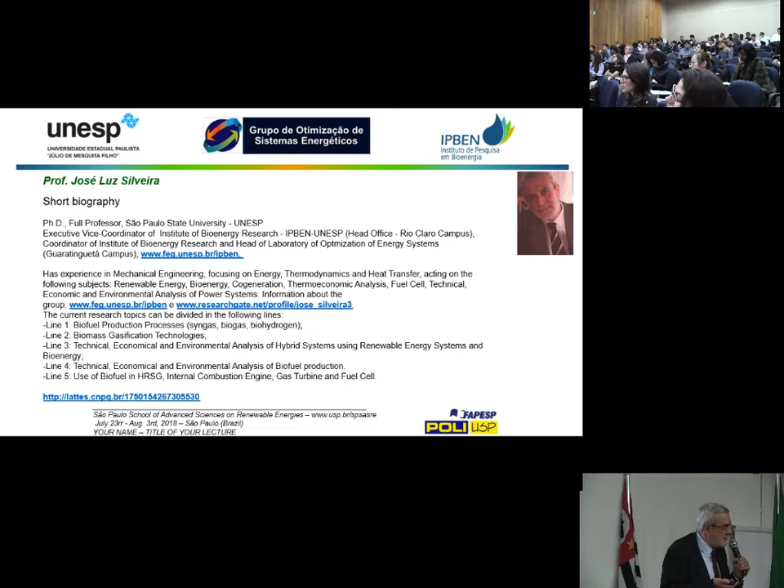This is my laboratory at UNESP. It's not mine alone - there is a group of professors and students who work on this. These laboratories were constructed through projects and financial support from FAPESP, the Council of Research and Development, and CAPES.

This is a vision of this laboratory, the Institute of Bioenergy Research in the College of Guaratinguetá, the Laboratory of Optimization of Energy Systems, with a partner working on electrical efficiency in these laboratories. We have organized some workshops also, as POLI has done in this case.

This energy sustainability, we have worked about this. There is some thesis about the sustainability in the hydrogen production process. It's very important. We have constructed some prototypes. In this case, I can work. This is...

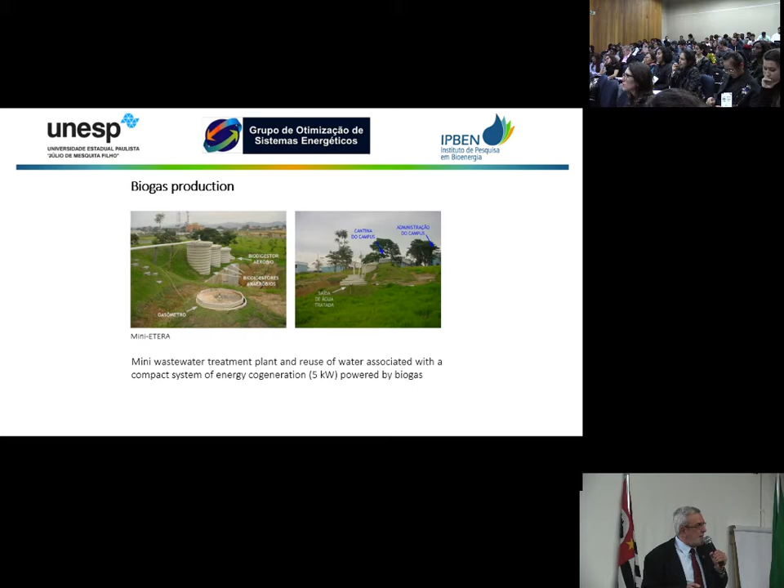This project was financed by FAPESP, by the Council of Research and Technology, and by the company Tigre. This is a project financed by the Council of Research and Scientific Development. It is prototype number 1.

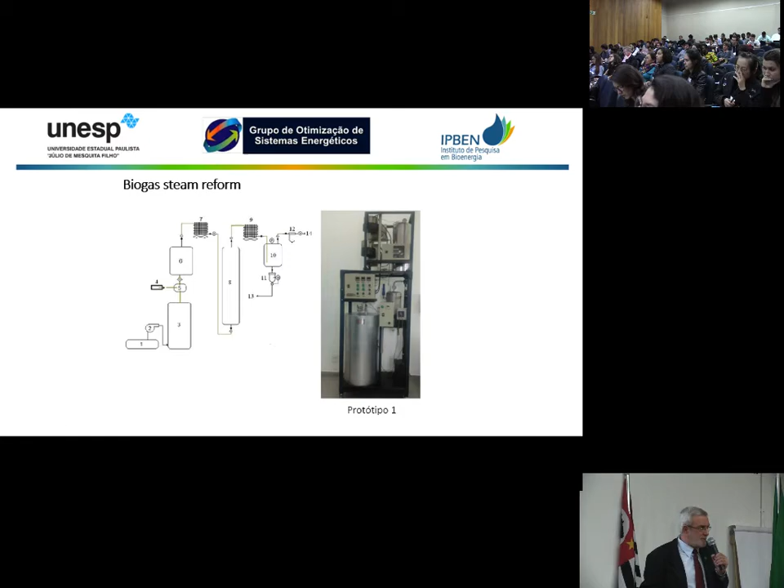It is a prototype developed for biogas steam reforming. This project was financed by FAPESP, the Foundation for Research of São Paulo State, the São Paulo Research Foundation, in its English name.

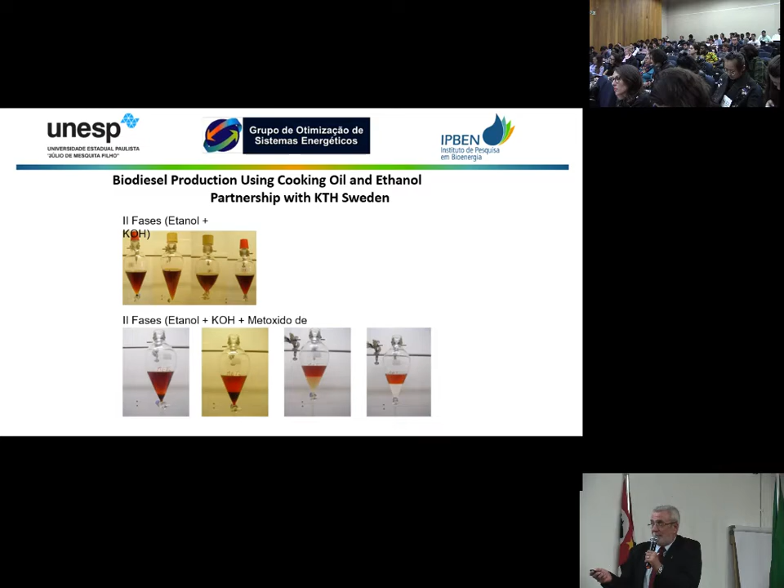This is the project about the production of biodiesel using waste oil from restaurants. In this case, it's very important: it's possible to produce biodiesel, but you need treatment of this biodiesel. After this, we worked on glycerol steam reforming. It's possible to produce hydrogen using this residual byproduct of biodiesel production. It's very important because if you use this glycerol energetically, the cost of biodiesel production is lower. The energetic valorization of glycerol is necessary for biodiesel to be competitive in the market, by lowering the cost of production. This is another project financed by FAPESP also.

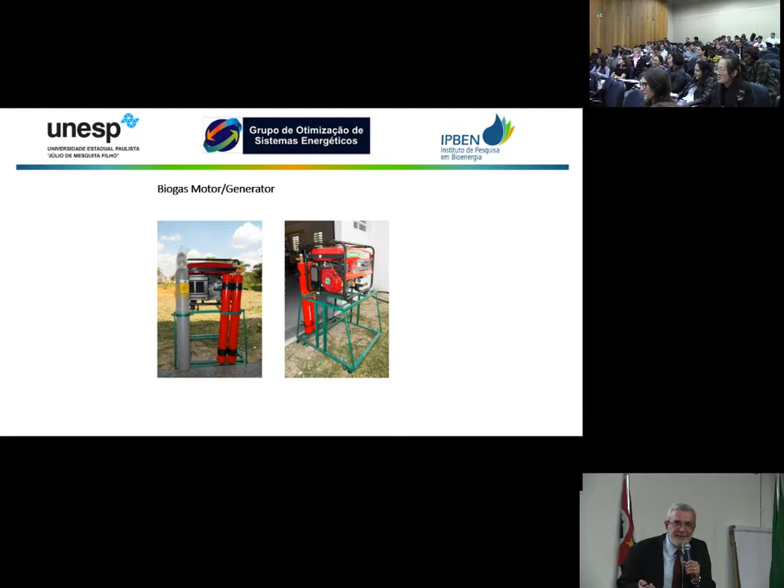This is an adaptation of the internal combustion engine to operate with cogeneration systems. In this case, we can use natural gas or biogas to produce electricity, and the water of the jacket for production of hot water. We also use the exhaust gases to produce more hot water, and finally use the gases at 250 degrees Celsius to run the absorption refrigeration system to produce cold water at 7 degrees Celsius. This project was also financed by FAPESP.

I love FAPESP. It's very important. Okay, thank you.

I love to study these prototypes. The idea is very important in thermodynamic studies—the possibility of sizing the heat exchangers and analyzing the thermodynamic losses.

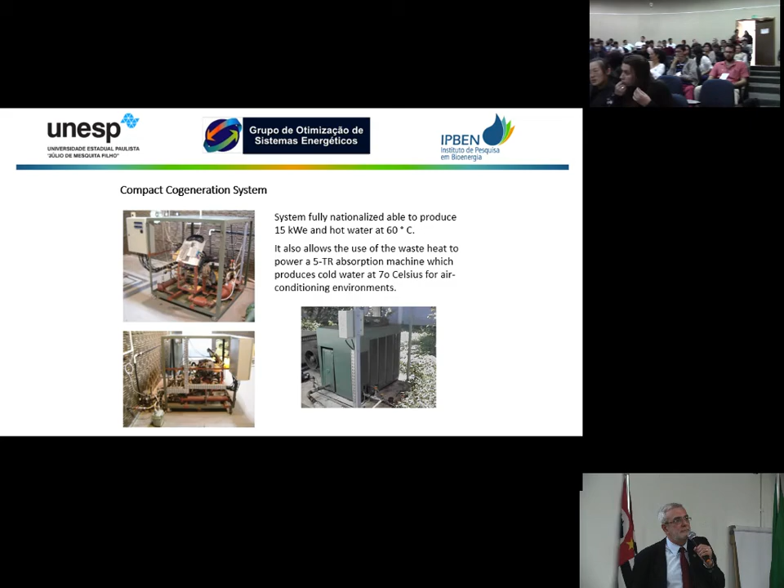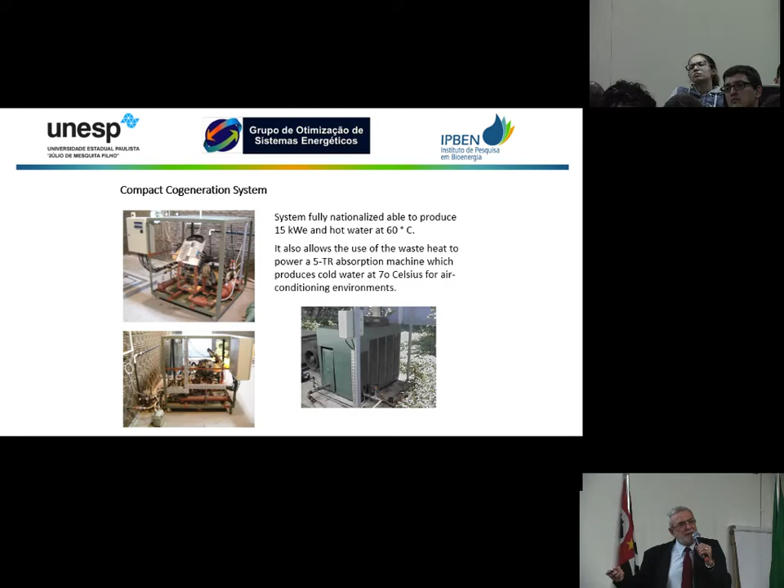Another question: why is the device's lifespan shortened when you don't use direct fuel burning to start the absorption machine? If you use direct burning, the life of the device is better, about 15 years. But using exhaust gases this way, the life is about 10 years maximum. The cost of investment for this kind of device is about $250 per kilowatt of refrigeration capacity.

The last master's and PhD research theses defended: thermoeconomic analysis and ecological efficiency of a thermoelectric plant with chemical absorption of carbon dioxide, and technical economic analysis of hydrogen production by glycerol steam reform.

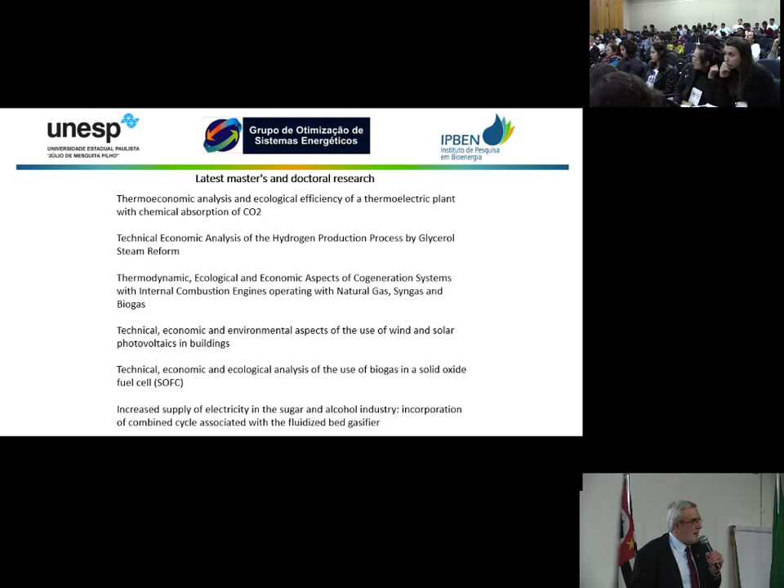There is currently a PhD thesis in development by Christian Lau, my student, through the Bioenergy Program of São Paulo State University, University of Campinas, and University of São Paulo, about the potential of bioelectricity production using combined cycle and gasification in the pulp and paper industry.

I love this topic, sorry. I love this—Suani, Professor Roberto also, I believe. I love it, it's my life.

The presentation of this book, in Portuguese, on Bioenergy. This book was written by professors at UNESP, professors of the Institute of Bioenergy Research.

I have 3 chapters in Portuguese: the use of biogas for production of cold water and electricity; biodiesel and syngas in internal combustion engines; and use of ethanol for production of hydrogen and for use in aircraft engines.

At this moment we have a project financed by CAPES and the Scientific and Technology Foundation of Portugal. It's very important—in this project we have considered the use of syngas blend mixture with biodiesel for bioelectricity production, using gasification of solid urban waste and biogas from urban organic waste.

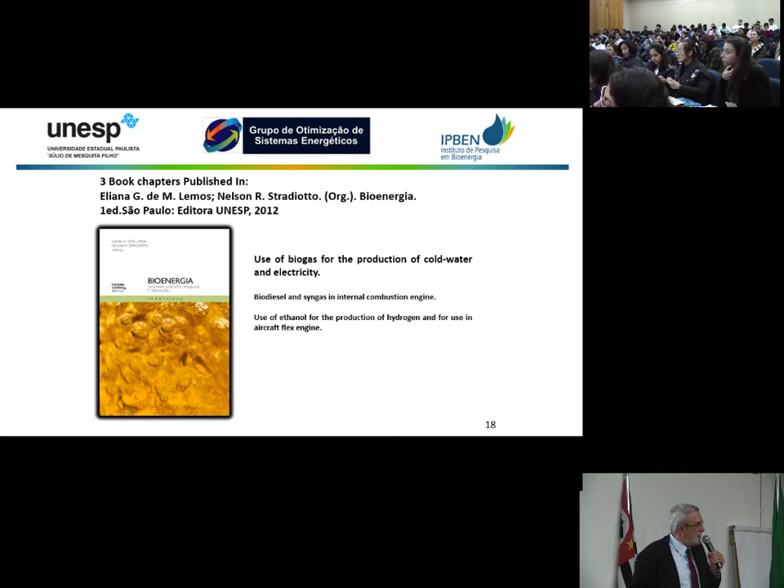This is a chapter of the book Biofuels in Brazil. In this chapter, technological advancements in biohydrogen production and bagasse gasification process in the sugarcane industry with regard to Brazilian conditions.

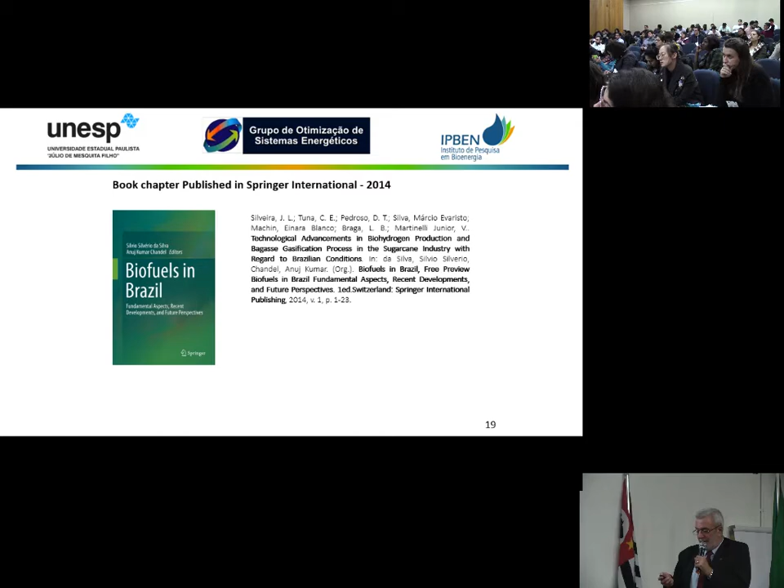For the development of science, I consider that papers and books need to be available. It's not important for a full professor to publish without showing it to people—people need to see, read, and study it. It's very important.

This is a project from CNPq about the gasification of sugarcane bagasse. In this case, it's the prototype for fluidodynamic studies, because there is sand and particulate bagasse, small particulates, and the air entering creates the flux current.

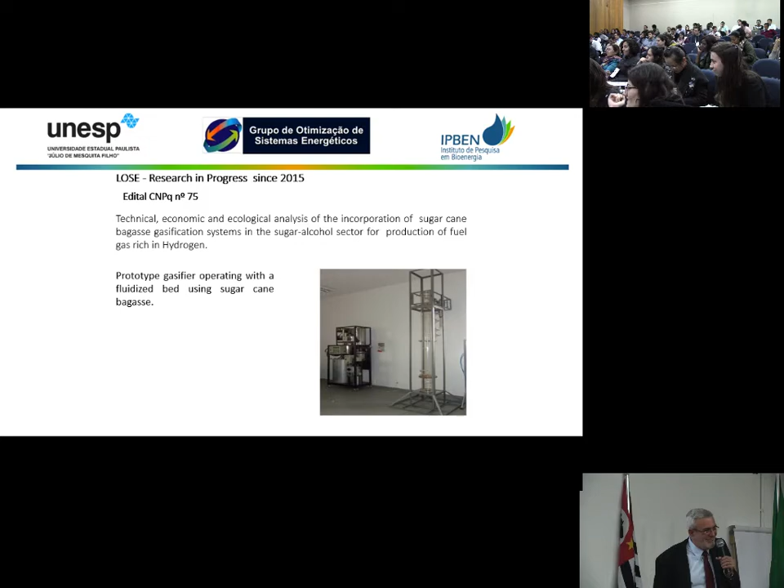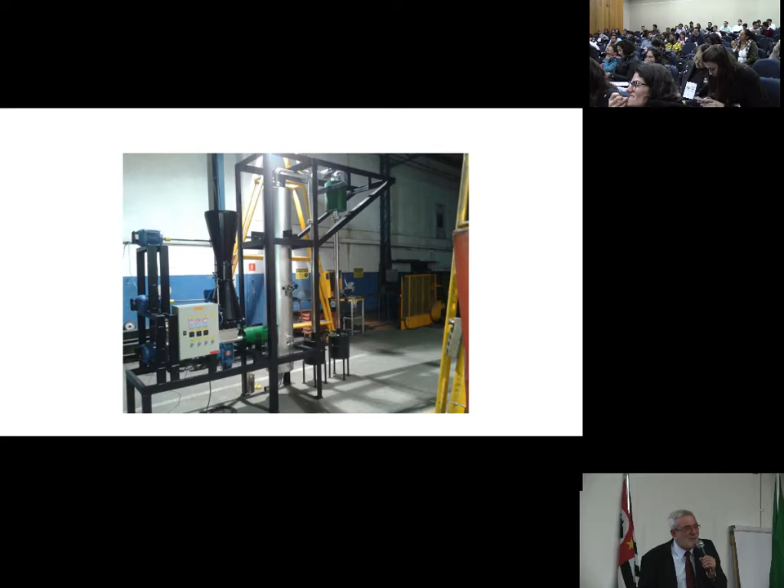It's very important. Now I have the prototype, but I don't have money for the operation. I need to make another project for financial support. It's not good for the resources.

Thank you. Just a quick question. Can you shortly explain how it works, so which unit is what?

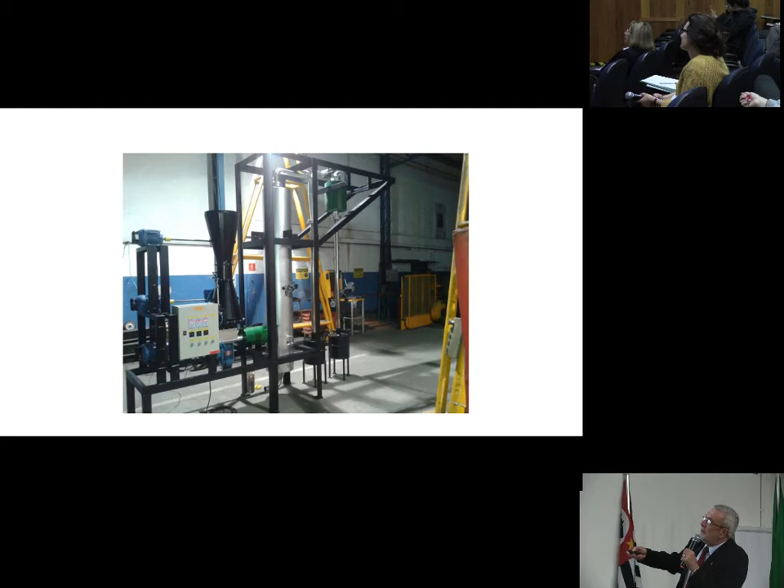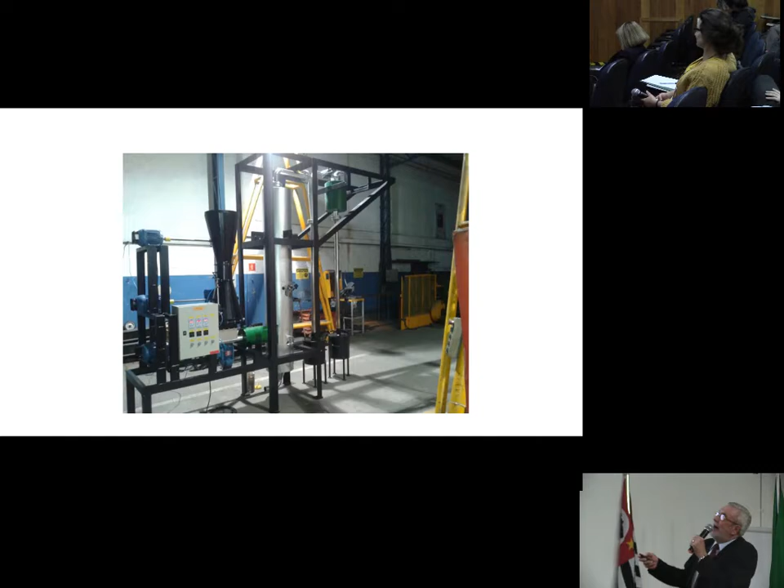There is a heat exchanger to separate the tar. After this, I have a syngas to use in a micro gas turbine, okay, in a heat recovery steam generator. I can use this kind of thing.

The gasification is very important. When I have syngas, depending on the gasification agent, I can use air, I can use pure oxygen, I can use steam as a gasification agent.

Okay, thank you. And one more question: is there something unique or specific about this prototype of gasification, different from other plants? In this case, it's a small gasification, but there are not many experimental studies about the gasification of sugarcane bagasse. Do you understand? There is use of other biomass, other kinds of fuel, but not sugarcane.

And my proposal, the proposal of my group, is this: increase of bioelectricity production in Brazil using biomass in the pulp and paper industry and sugarcane industry. There is a supply of electricity in the sugarcane industry, but there is not supply of electricity in the pulp and paper industry. Do you understand? And you need an increase of electricity production, bioelectricity production.

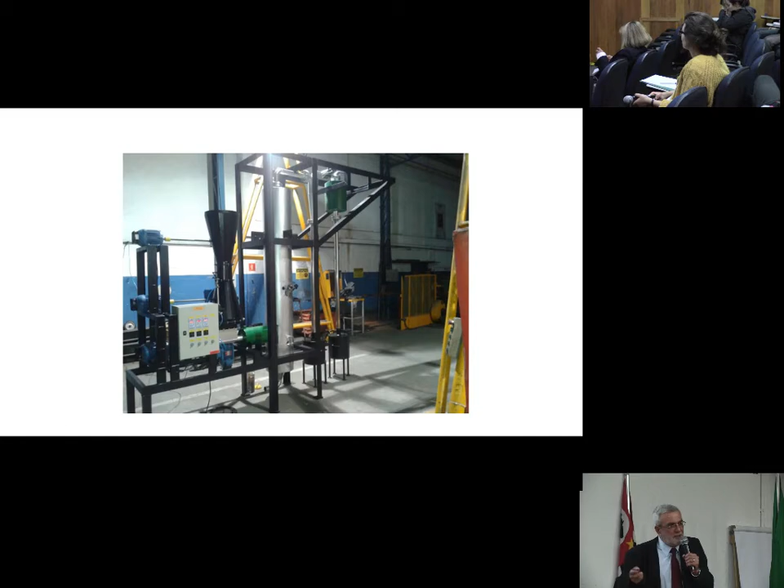In this moment, there is a crisis. The water in the reservoirs of the hydroelectric plants is not good in this moment. In São Paulo, perhaps there is a crisis. There will be a crisis about this.

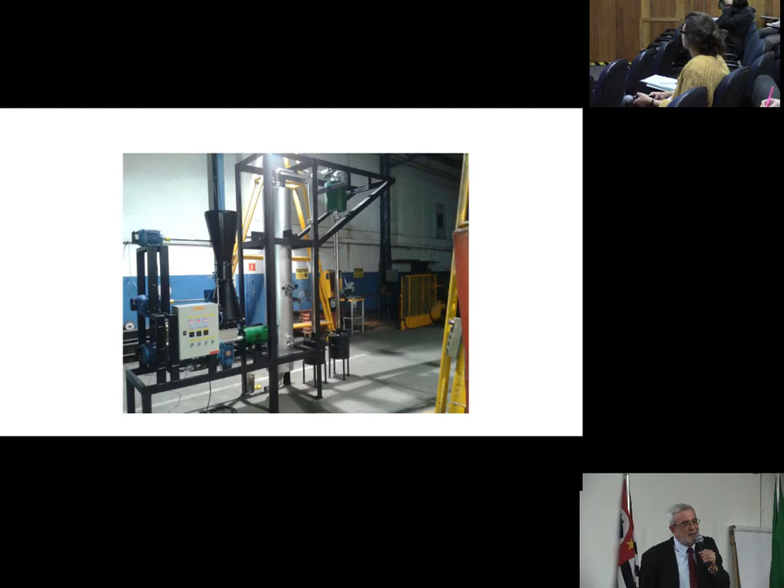And we have work about the potential. Pulp and paper and the sugarcane industry are the most intensive sectors using biomass, energy from biomass. And you need to increase this, and this kind of technology is very important.

In this case, we have photovoltaic systems in my laboratory, and we have bought a wind turbine, a vertical wind turbine.

In this place, Guaratinguetá, there is no wind velocity adequate as in Fortaleza, for example. So a horizontal wind turbine is not possible, because the horizontal wind turbine needs a minimum of 4 meters per second velocity. In Guaratinguetá, there is a velocity of about 2 meters per second. In this case, a vertical turbine is recommended.

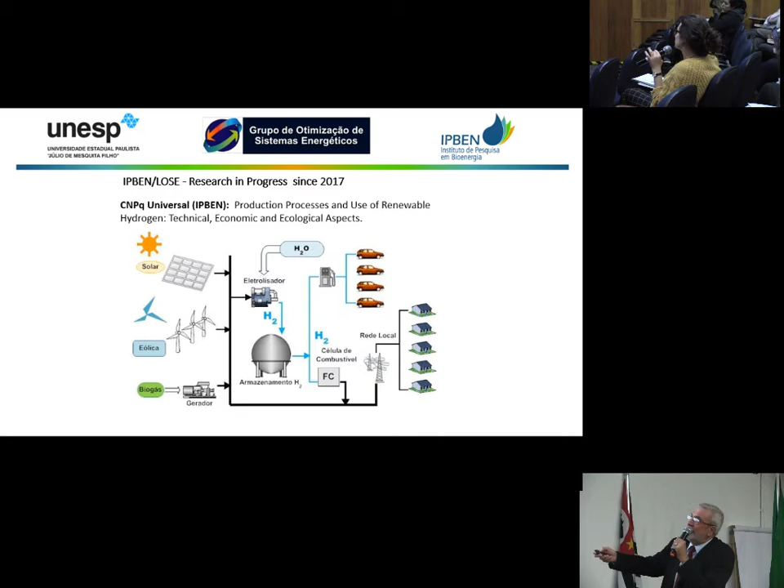The electrolyzer efficiency is about 60%, but the solar energy efficiency is about 15%. The final efficiency of hydrogen production is the multiplication of the efficiency of this power plant by the efficiency of this electrolyzer. See, it's very important.

The hydrogen will be produced only when I have supply of electricity. In Germany, there are some power plants operating based on this model. We have papers about this, and you need to consult them to go deeper.

I have a student working on hydrogen production from glycerol, João Tavares, and I have a student from France, Institut La Rochelle, Adrian, working on the electrical vehicle, the electrical car. It's very important, the future, but it's very important for the reduction of pollutant emissions.

These projects now... please, can you go back to the previous slide? Yeah, it looks like a hybrid system, right? Yeah, yeah, the name is hybrid systems, considering electricity, bioelectricity, but hydrogen production also.

I want to know the methodology behind it. Is it like, did you use mathematical modeling or simulation? Yes, yes, there are 2 or 3 theses about this.

The chapters of the thesis cover the introduction, the state of the art of hydrogen production processes, written in Portuguese, but there are chapters in a Springer book based on this thesis. There are studies about hydrogen production by steam reform, by electrolysis, and from algae. There is thermodynamic analysis of the hydrogen production process, analysis of the hydrogen production process, and environmental analysis of the hydrogen production process.

In the case of environmental analysis of the energetic process, there are six models of environmental analysis. But in particular, I like a model by Cardu and Baica that considers the emissions of pollutants indicated by the World Health Organization. There are limits of emissions for human life and for plant life, and this is considered for the determination of environmental efficiency.

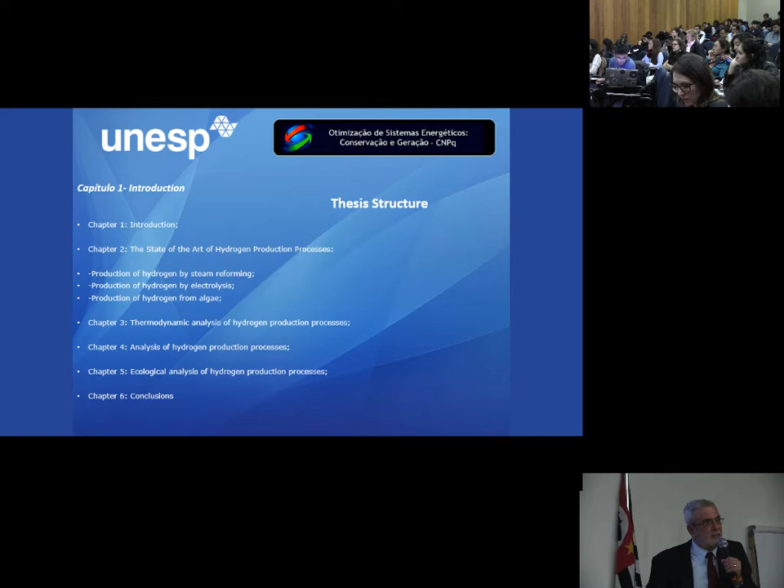This thesis is written in Portuguese, but there are 5-6 papers published in journals in English about this. These papers are available on my site. Some students there worked on hydrogen. There are many papers, okay, but we have some too.

The objective of this PhD thesis is to assess the hydrogen production process on technical, economic, and environmental issues: the technical energy efficiency of each process, and the economic determination of the cost of hydrogen production based in US dollars per kilowatt hour.

You know hydrogen has a high lower heat value, high energetic density. The lower heat value of hydrogen is about 120,000 kilojoules per kilogram. In comparison, natural gas is about 47,000 kilojoules per kilogram.

Why produce hydrogen? Because hydrogen is a small molecule, it's a fuel with high energetic density. It's very important - humanity needs to store energy, and it's possible to store hydrogen.

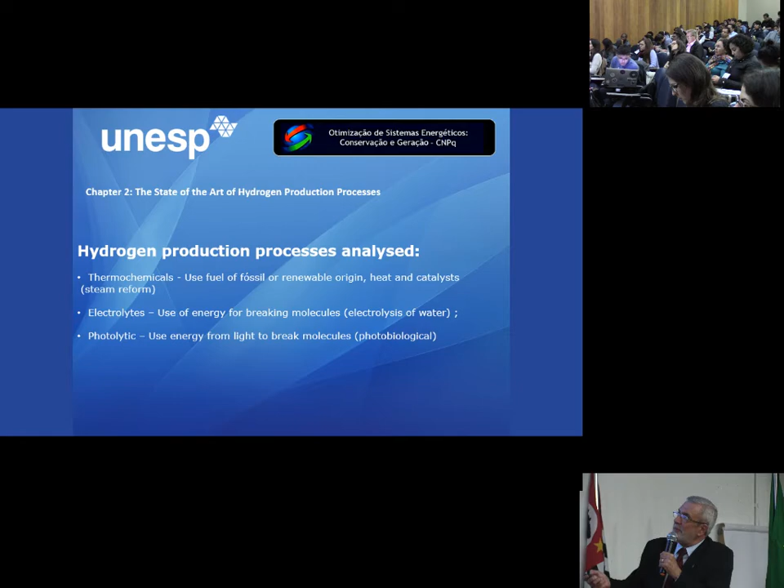Some pictures about the hydrogen production processes analyzed: thermochemical, electrolytic, photolytic.

Steam reform for hydrogen production. In this case, fuel and water go to a steam generator to produce the steam mixture, and in the main reforming process it operates at about 700 degrees Celsius. You need a shift reaction to reduce the carbon monoxide, because carbon monoxide...

...is not good, for example, for proton-exchange membrane fuel cells. The contamination of the electrolyte is very bad for the life of this kind of fuel cell device, because the production of hydrogen is meant to be used in fuel cells.

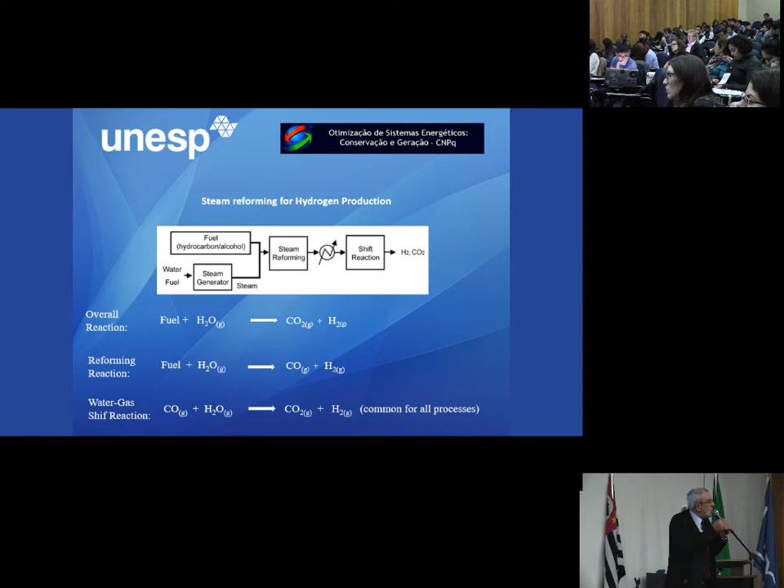It's not possible to use direct combustion in an internal combustion engine with hydrogen, because of the temperature and the materials involved. In this case, the internal combustion engine would need to be constructed using niobium, zirconium - very, very expensive.

Many people ask, why don't you use a direct hydrogen internal combustion engine? It's not possible, but you can perhaps use a small quantity of hydrogen. Some experiments and studies consider a car using an internal combustion engine with a small electrolyzer for hydrogen production, injecting it together with gasoline. That's possible, but pure hydrogen alone is not possible.

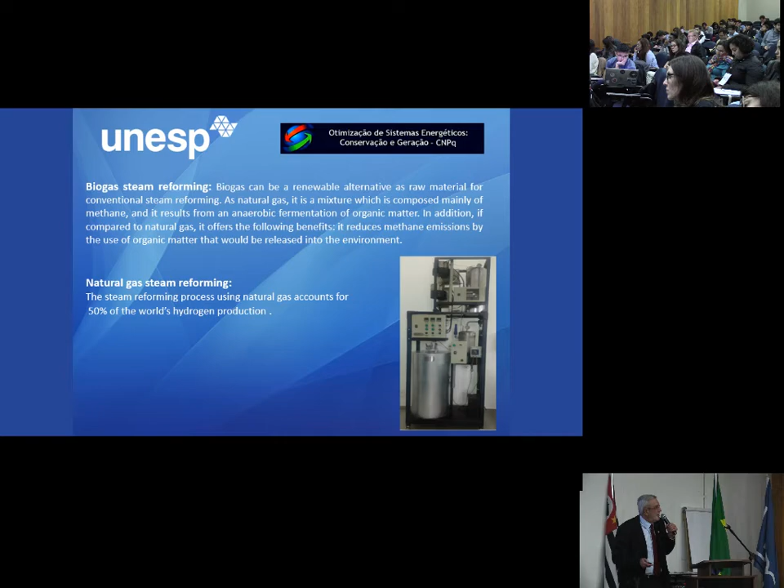It's very important in this case for steam reform - prototype number 1, the biogas steam reform. There is a small steam generator that produces steam which is input into the reformer together with biogas for the chemical reactions to produce hydrogen.

The electrolysis process, as you know from undergraduate studies: the electrolyzer has anode, cathode, and electrical current passes through distilled water to produce hydrogen and oxygen. The fuel cell is the reverse process - hydrogen at the anode, oxygen or air at the cathode, to produce electricity.

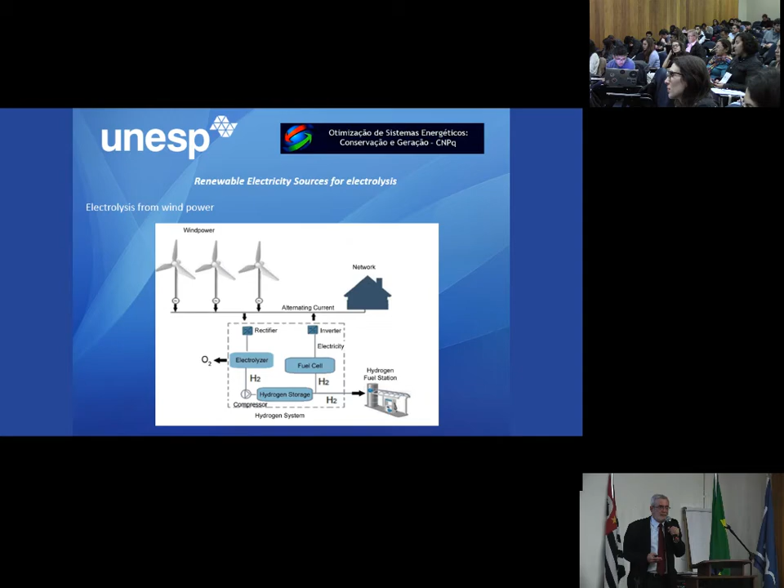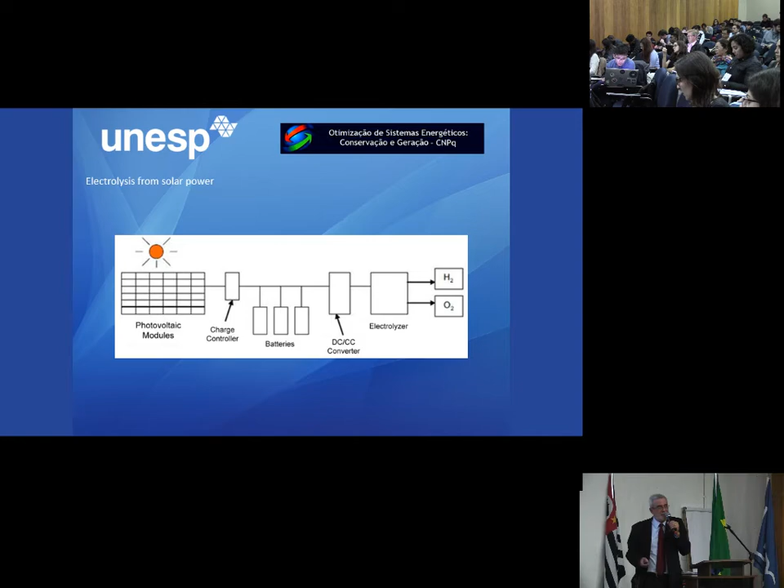Solar hydrogen production - this device and scheme is shown in the Springer book. Sometimes when I have water at night in hydroelectric power plants, I can use the produced electricity with an electrolyzer to produce hydrogen, and store it for use at another time.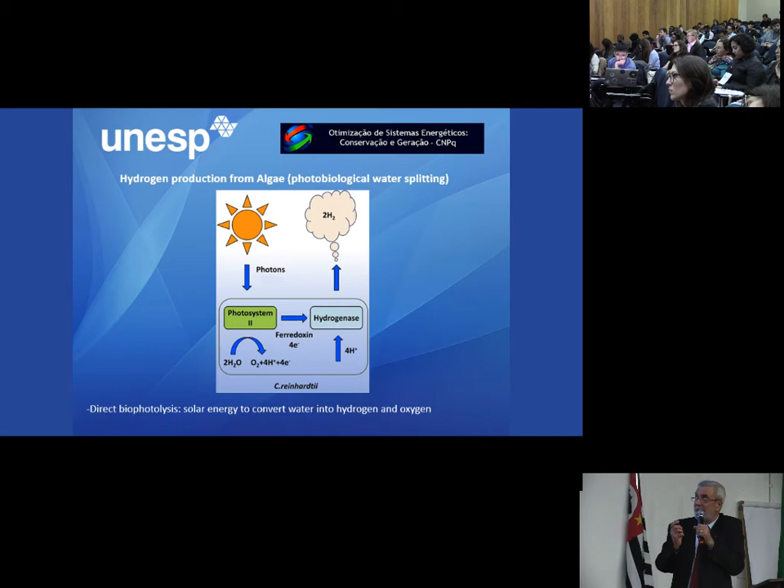Microalgae - there is a process using cyanobacteria as well. The cyanobacteria consume the microalgae and produce hydrogen, the pool of hydrogen.

This process uses solar lighting or night lamps - special lamps to permit the production of hydrogen. This research was developed together with Florida State University. My friend, Professor Juan Ordonez, was a co-supervisor of this thesis, and the experimental studies were made at this university.

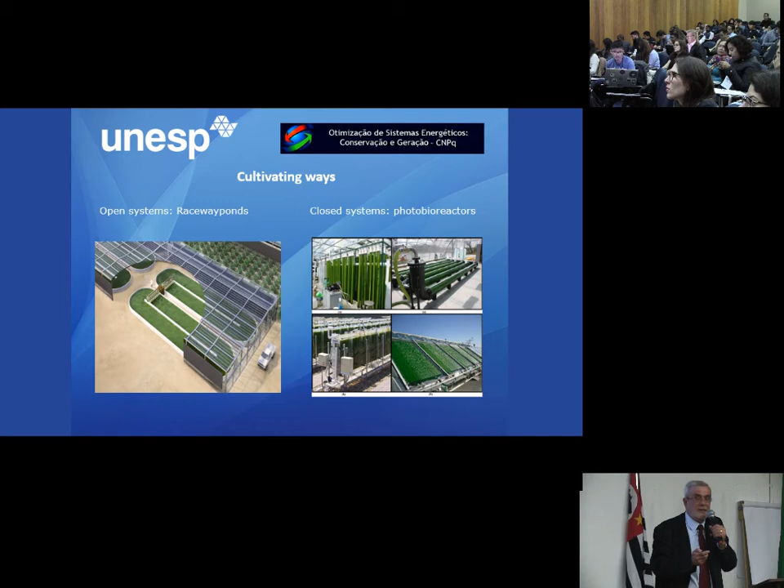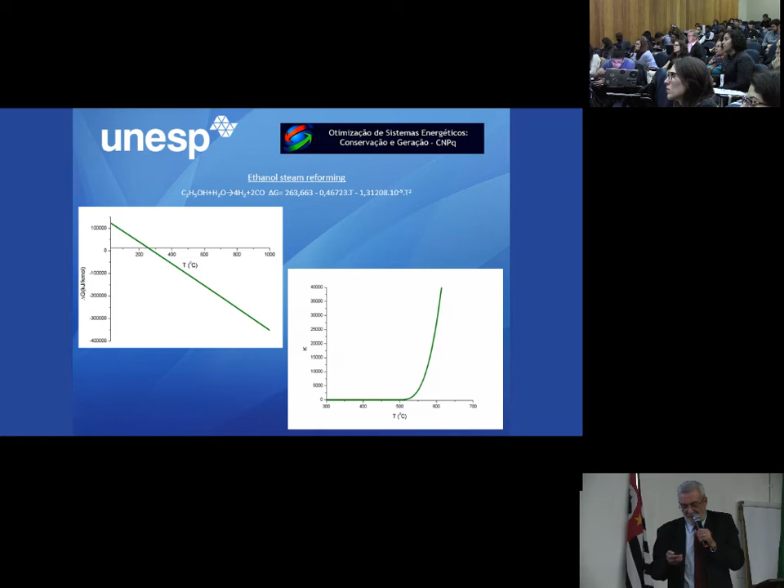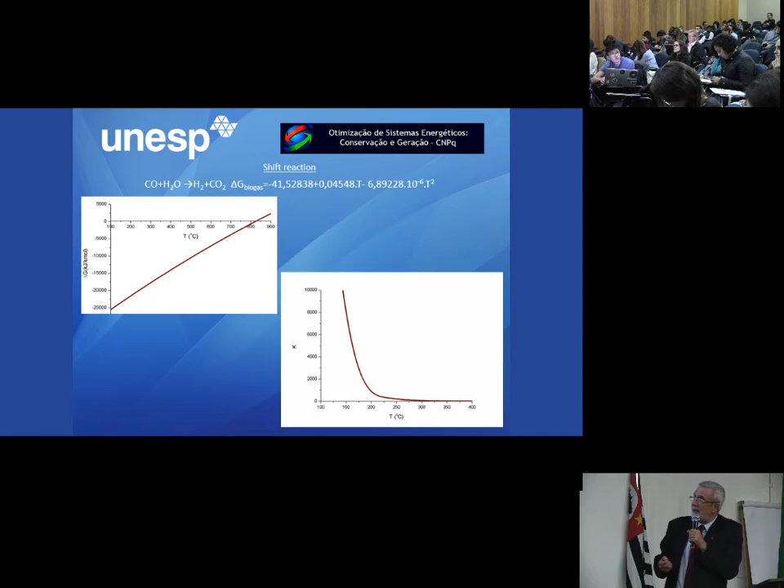Reactor shift. Some curves. The influence of the pressure.

Many times people consider high pressures for steam reformers, but it's not necessary. More pressure indicates more level of irreversibility in the process, because high pressures need more energy to operate. It's not so good.

Many cases, I don't have time, and I need to discuss the power plant energy efficiency of the electrolysis process. It's very important.

Electrolysis for wind hydrogen production: there is 29-30% global efficiency. Solar is about 10%, 12%, 11%, because the photovoltaic panel has a lower efficiency of power plant.

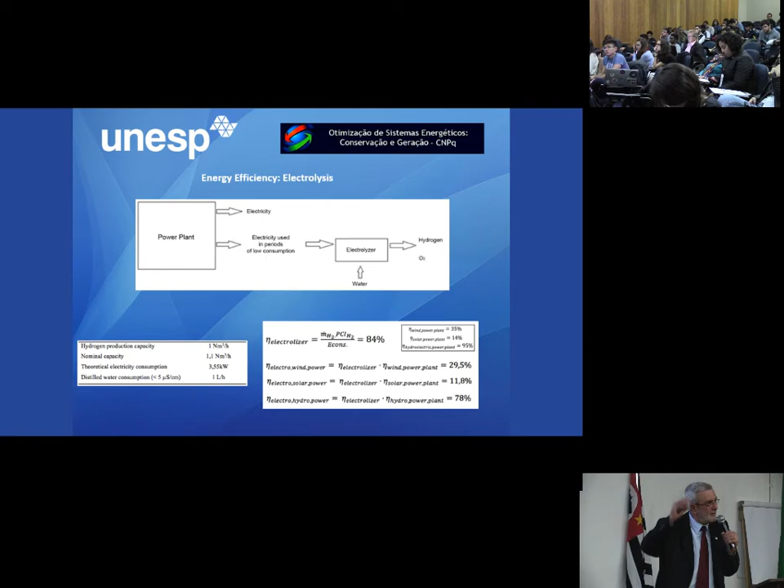Lower efficiency of power plant. Electrolysis for hydroelectric power plants is very high because the efficiency of the hydroelectric power plant is very high, 90%, 80%. You understand? It's very important.

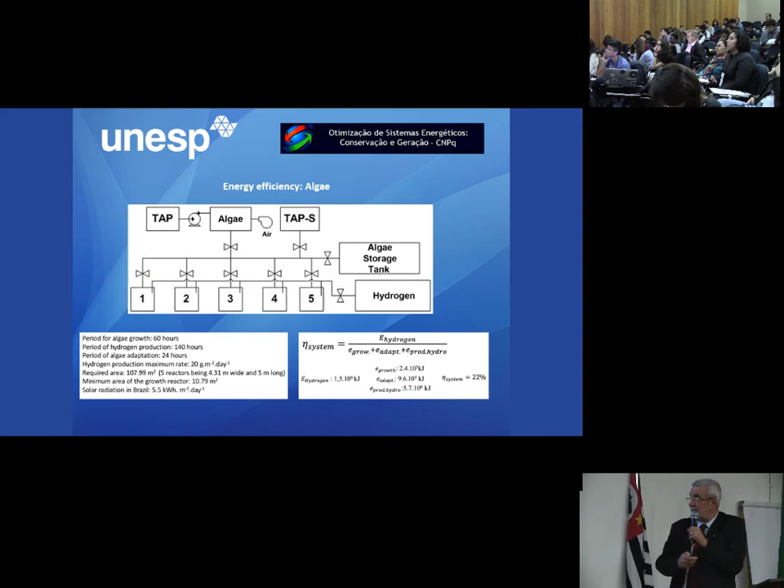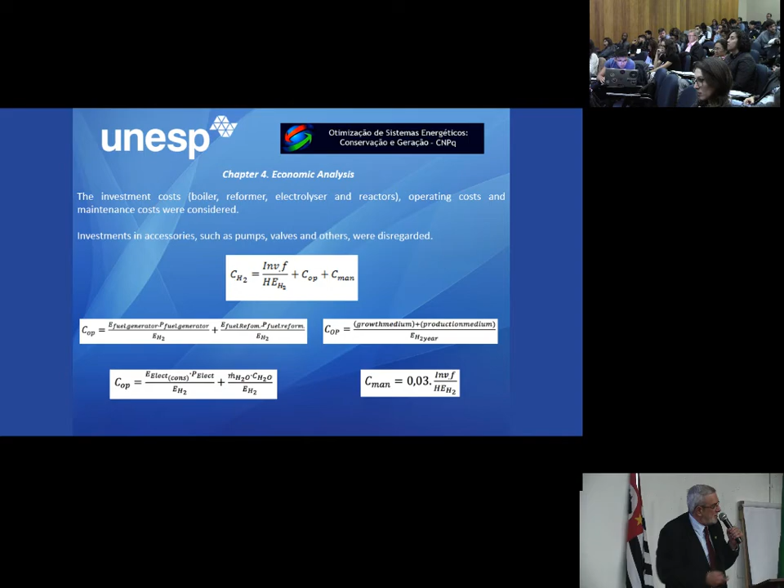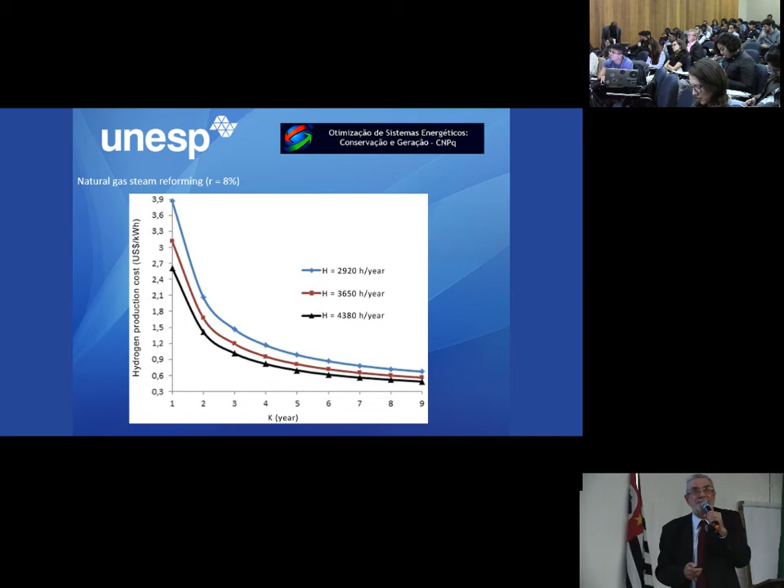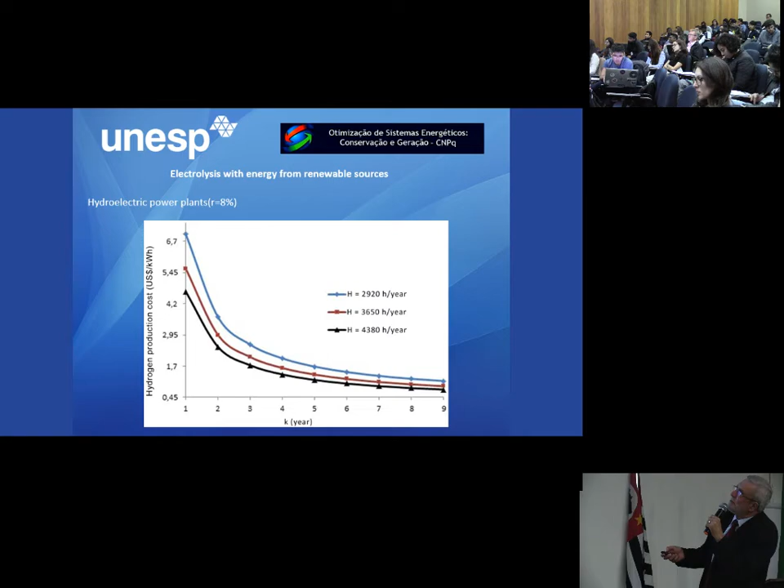In this case, natural gas steam reform, the cost of hydrogen production. In this case, biogas steam reform. In this case, wind power, wind hydrogen production cost. In this case, hydrogen production cost considering solar energy, very expensive. In this case, hydrogen production process in hydroelectric power plants.

Using algae, and the cost of hydrogen production across all processes. Steam reform of ethanol is very good, it's very good, it's very cheap.

I believe in hydrogen production in the sugarcane industry in the future. The power plants, the sugarcane industry can sell also hydrogen in the future.

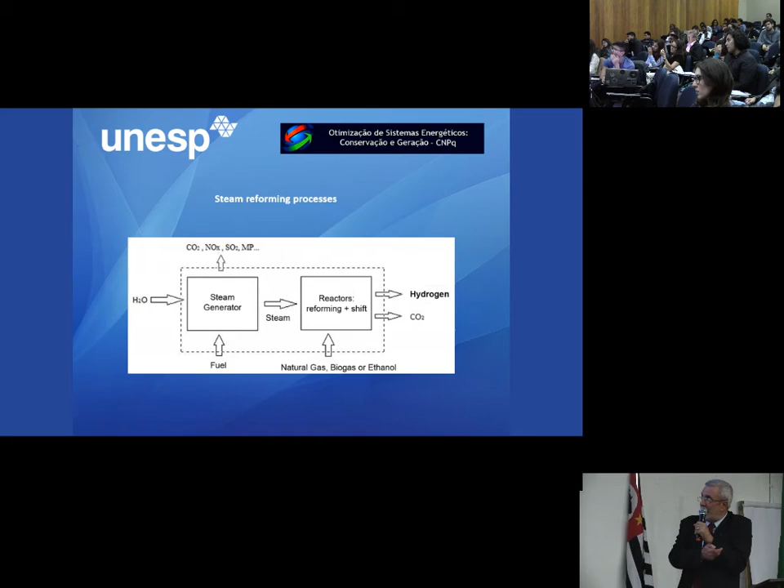It's very important. About the environmental efficiency, the modeling of Cardu and Baica, and this equation which indicates pollutant emissions, equivalent dioxide of carbon, is determined for all the process, and I have in the final a comparison with all the processes: environmental efficiency, dioxide of carbon equivalent indicator, pollutant indicator, kilograms of dioxide of carbon equivalent per kilogram of hydrogen, and you have the indicator.

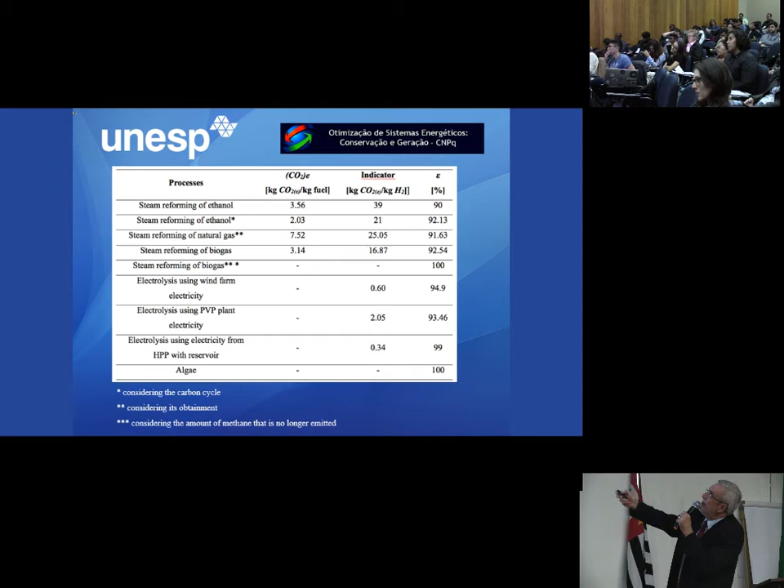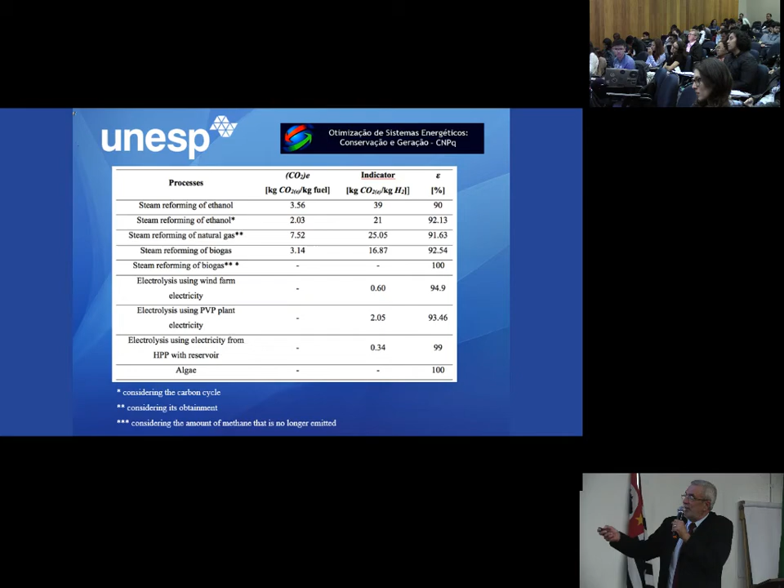The best efficiency is algae. Environmental efficiency is very high, and the lower efficiency is for this process, steam reform of ethanol in this case, but this does not consider the credit of dioxide of carbon. If I consider the dioxide of carbon, the second is algae, and it's not important.

I don't have time, but it is very important. Okay, it is very important.

He studied technical and environmental issues of the hydrogen production process from biogas and its use in PEM fuel cells, proton exchange membrane fuel cells. In the past, Nafion was a waste product, Nafion from DuPont. And after this, they discovered its electrochemical properties, and now this material is very expensive, okay?

Because this kind of PEM fuel cell is very good for electric cars, operating at about 100 degrees Celsius, okay?

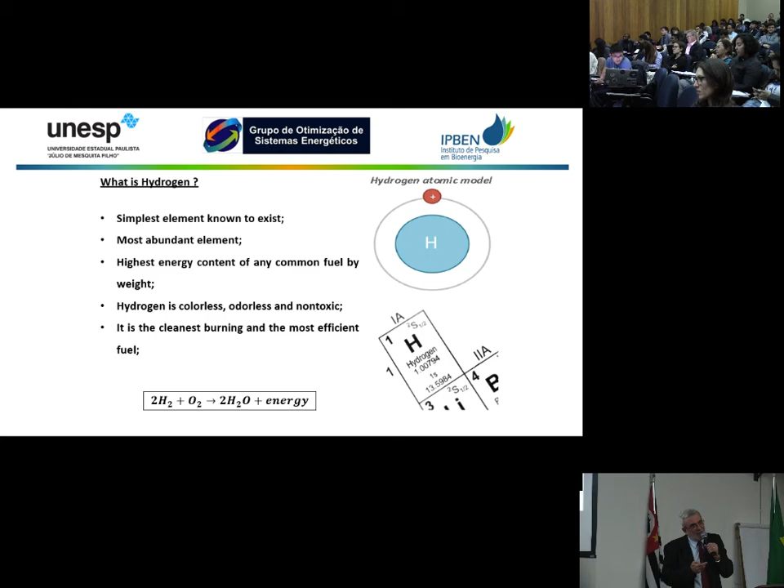There are other kinds of materials for hydrogen production. Hydrogen is very important, for example using water energy for production. But there is no cleaner fuel than hydrogen.

We consider some studies to reduce environmental greenhouse gases. In a landfill, there is production of biogas. This biogas can be used to produce hydrogen. In the fuel cell, there is the anode, the cathode, and the electrochemical substance for production of electricity.

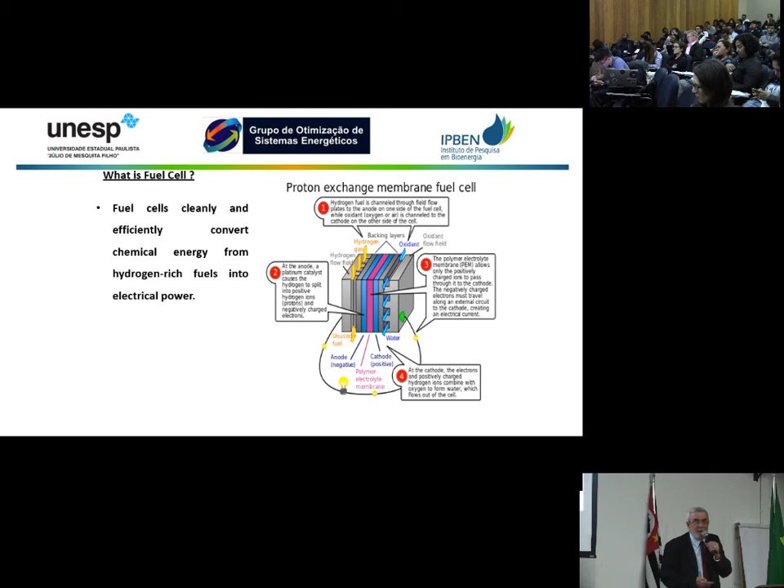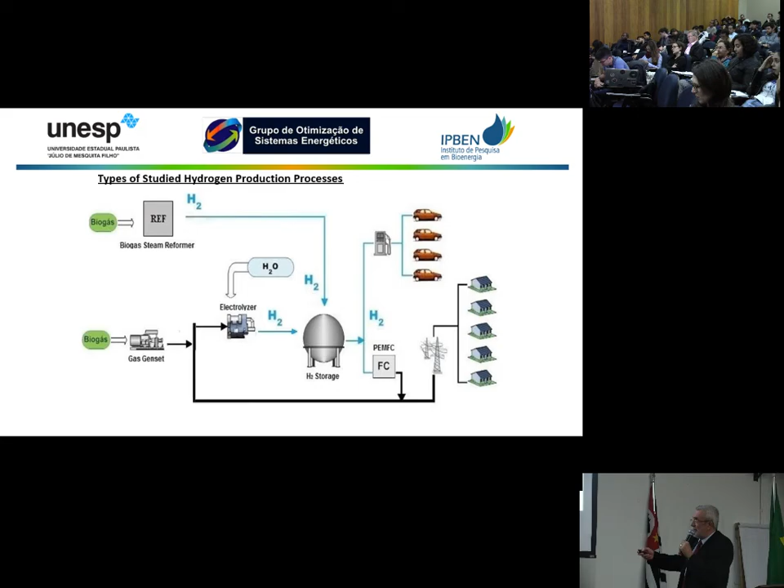This is part of old projects that we have developed. In this case, we use biogas with steam reforming directly for hydrogen production, or we use the biogas for bioelectricity production and use this bioelectricity for hydrogen production. Then this hydrogen is used in a fuel cell.

It's an electrolyzer, commercial, available in the market. And steam reforming of the biogas.

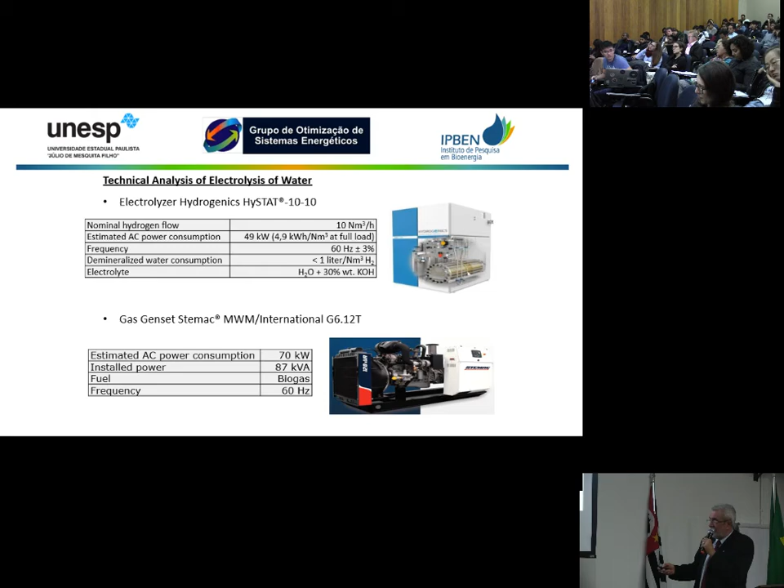Some electrolyzers in the market, their hydrogen production capacity, power consumption, and some equations. The electrolyzer efficiency for hydrogen production is the ratio of hydrogen energy production, power production, by the consumption of energy in the process.

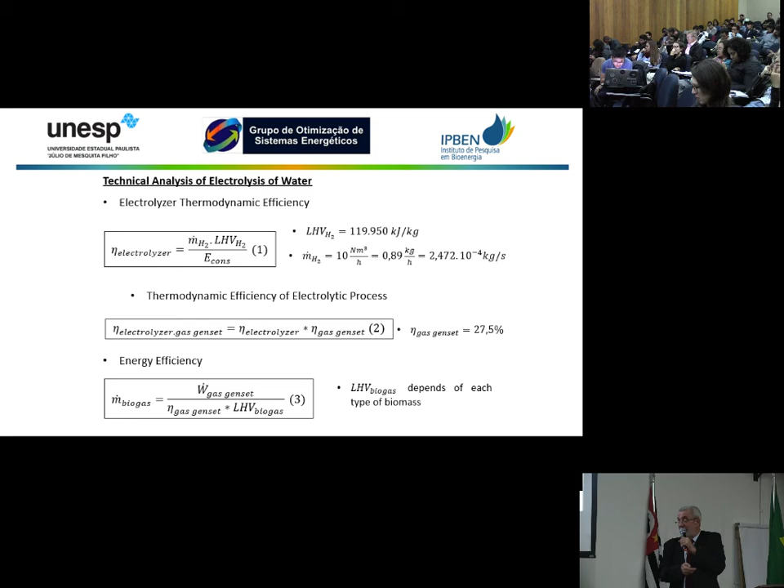There is a thermodynamic efficiency of the process, the electrolyzer efficiency, and the efficiency of the engine. Energy efficiency and the flux of biogas — it's possible to use this equation to determine this energy parcel. Some equations.

For steam reforming of biogas, the efficiency of the steam generator is considered. The thermodynamic efficiency of the biogas reform process is the mass flow of hydrogen times the low heat value of hydrogen, divided by the energy used in the process, considering the biogas low heat value for steam reforming.

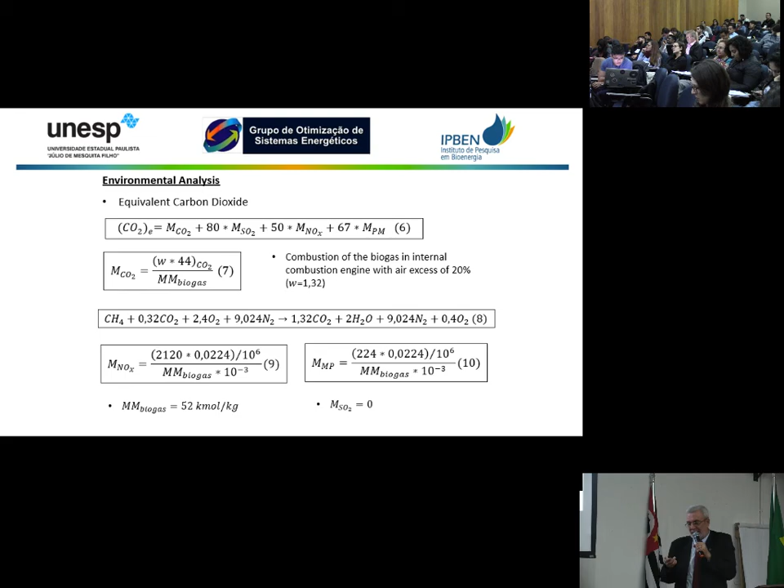In this case, you use the biogas for bioelectricity production and the biogas conversion to hydrogen. Main equations for the carbon dioxide equivalent. This paper is also available on my site. The pollutant indicator, the environmental efficiency, using the model of Cardu and Baica.

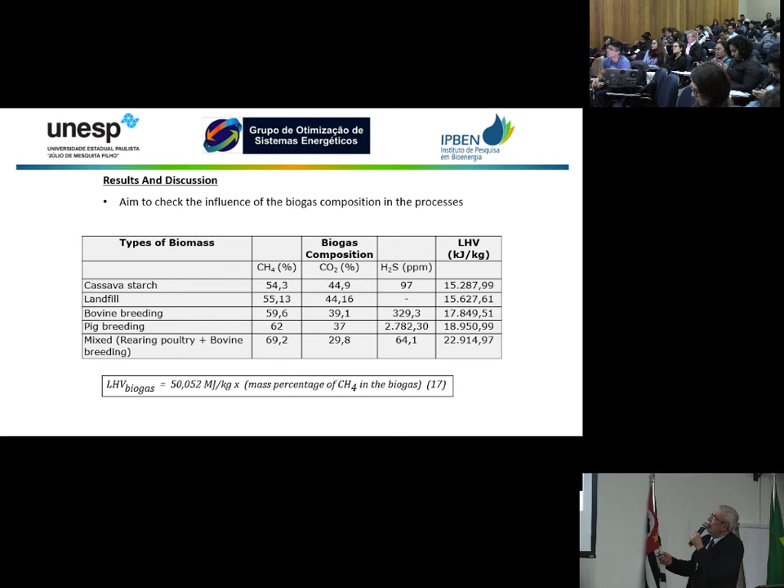Electric cars in the future will also use fuel cells, proton exchange membrane fuel cells. Many equations for calculation, many pieces of information, and some results of the biogas composition, the low heat value of the biogas, and the results of thermodynamic efficiency of the process: steam reforming of biogas and electrolysis of water.

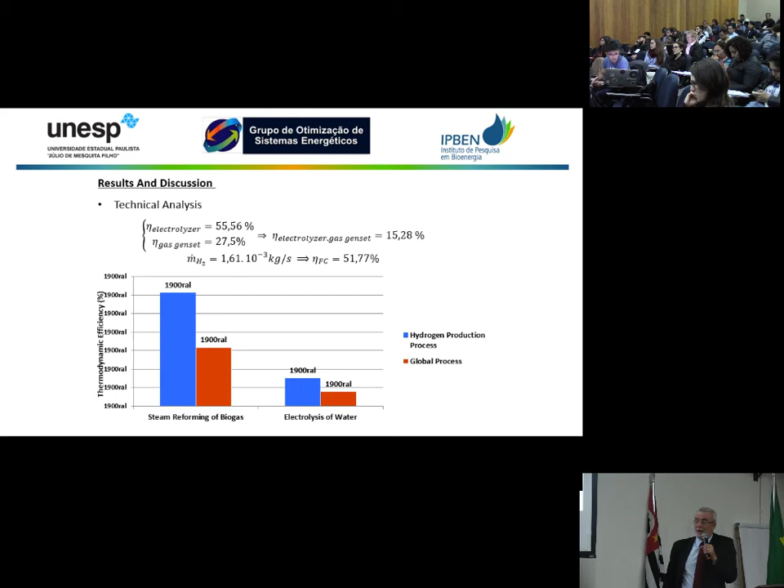Electrolysis of water presents a small efficiency, but it's very important. The steam reform process is often very expensive to consider. Some equations. Conclusion: the use of biogas from the landfill of São Paulo City for bioelectricity generation.

This is very important. It's part of the master's degree of Mariana Carvalho Guimarães. This thesis is in the middle of development. Regina Francielli is a PhD student and she also studied the use of biogas for bioelectricity production.

The objective is the development of technical and economic analysis of the use of biogas generated in the landfill from São Paulo City, Brazil, comparing the use of an internal combustion engine versus micro gas turbines.

Thermodynamically, there is a difference between using a micro gas turbine or an internal combustion engine. Why? An internal micro gas turbine has an air-to-fuel ratio of about 60, while an internal combustion engine has an air-to-fuel ratio of about 10 or 11. So in a micro gas turbine there is a greater quantity of exhaust gases.

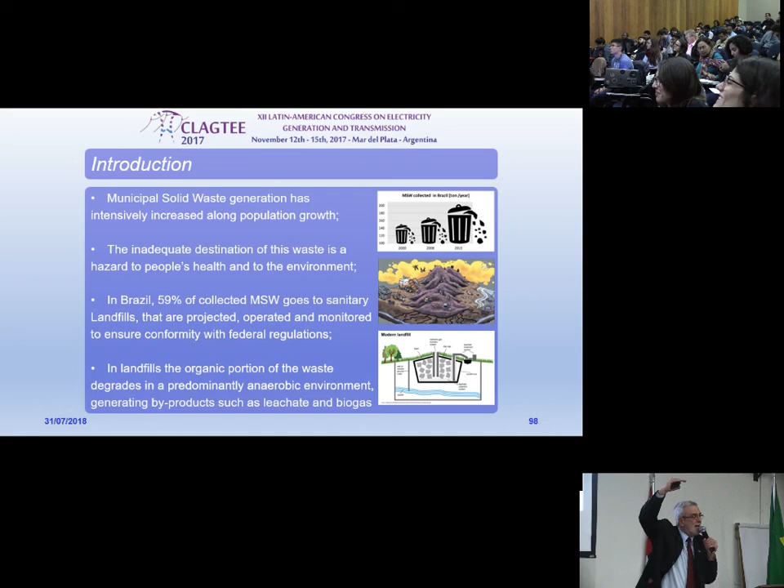In a landfill, there is a life cycle of about 18 years for biogas production. After this, the biogas production decreases. The useful life of the landfill is about 30 years.

Professor, may I have a question here? Okay, wait.

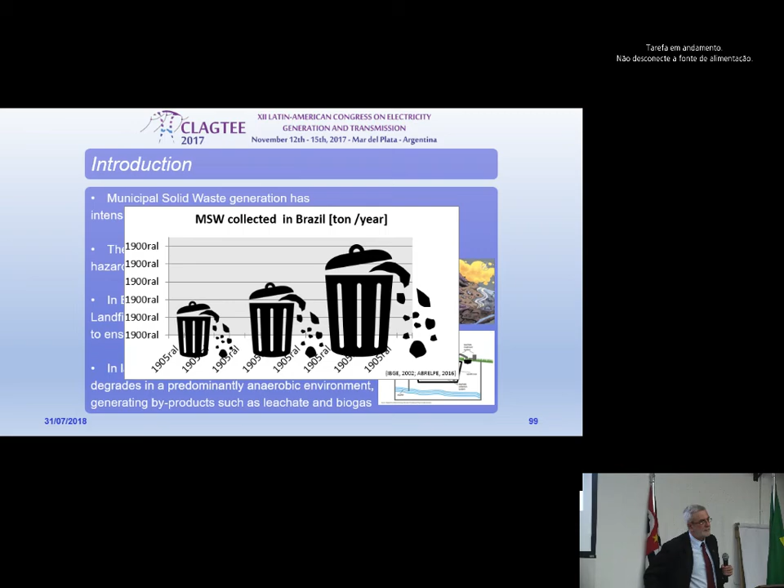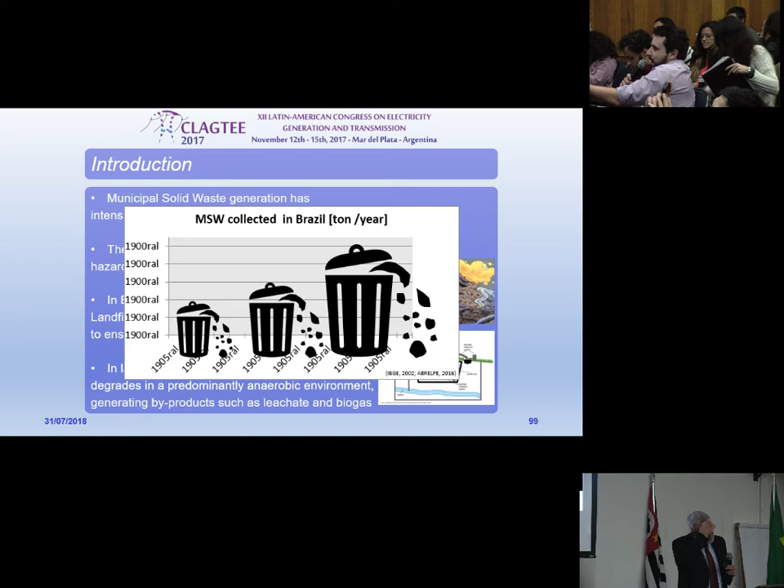Are you assessing the feasibility of using gas turbines or internal combustion engines? As far as I know, it's cheaper to buy an internal combustion engine here in Brazil for this kind of solution. But there is an assessment of the concentration of methane in your biogas, which affects the pollutant emissions from one kind of combustion to another. Both are in high pressure ratios, and they generate some kind of pollutants that doesn't happen when burning in ambient pressure.

Did you see it as a feasible solution to use gas turbines with bottom cycles that could also generate energy, like the organic Rankine cycle, or the one with ammonia mixed with water, which is a kind of Rankine cycle already used extensively in Europe? But in Brazil, in South America in general, there is only one installation, in Chile, generating something around 15 megawatts. This is a technology feasible to generate a lot of electricity, but why do I not see any movement to study it?

I believe in organic cycles, using these cycles in landfills. I believe in it for the future.

I know some papers about this, but in this study we have considered the micro gas turbine because some landfills in São Paulo city already use internal combustion engines. In this case, the power capacity of the internal combustion engine is not higher, because in the market there are not many internal combustion engines with high capacity available.

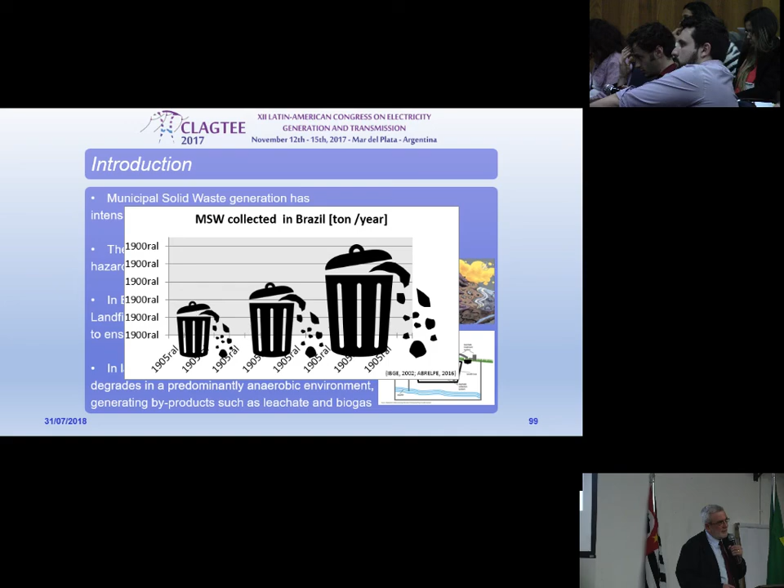I understand that the composition of biogas from landfill is very good. It's about 60% methane, and about 40% carbon dioxide, considered in this case.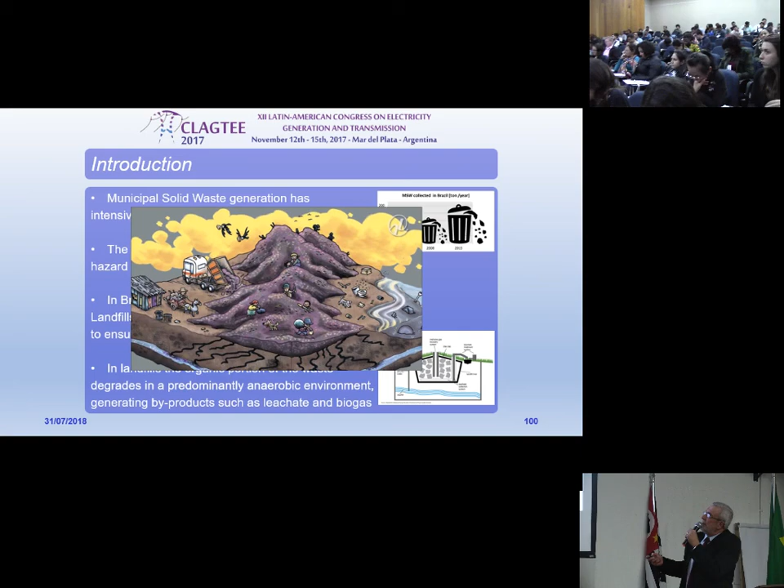But I have some information for you about your question. This is the evolution of municipal solid waste in Brazil. It's very important, the increase. The municipal solid waste generation has increased.

Visiting São Paulo city today, I see the river, and it's very important that the population be educated about this. It's not a political problem alone; the population is also responsible for the generation of this kind of waste.

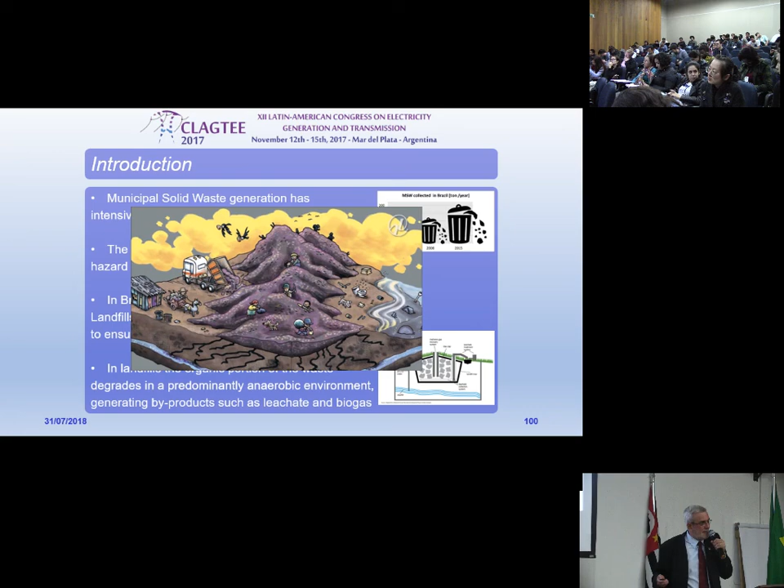And the modern landfill, the biogas production, and the recirculation are very important. A landfill has a lifetime of about 30 years, with 18 years of increasing electricity production, and after that it decreases. So the economic analysis is very important, because this decrease raises the cost of bioelectricity and biogas production.

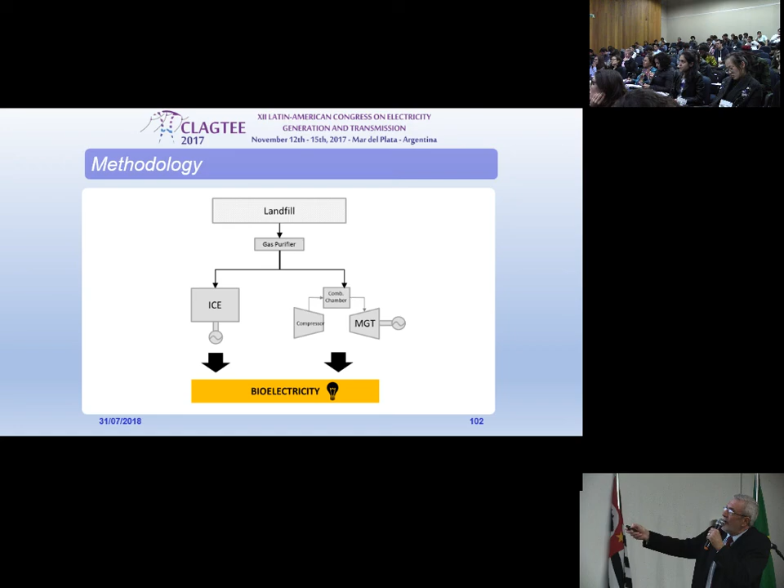We have considered the purification of gas. For landfill biogas, using an internal combustion engine or micro gas turbine, the idea is a comparison of the bioelectricity production.

So the biogas composition considered in this study includes the Caieiras landfill, the biogas production from the CDR landfill of São Paulo, and the CTL. Based on this quantity of biogas available, what is the capacity of the bioelectricity production?

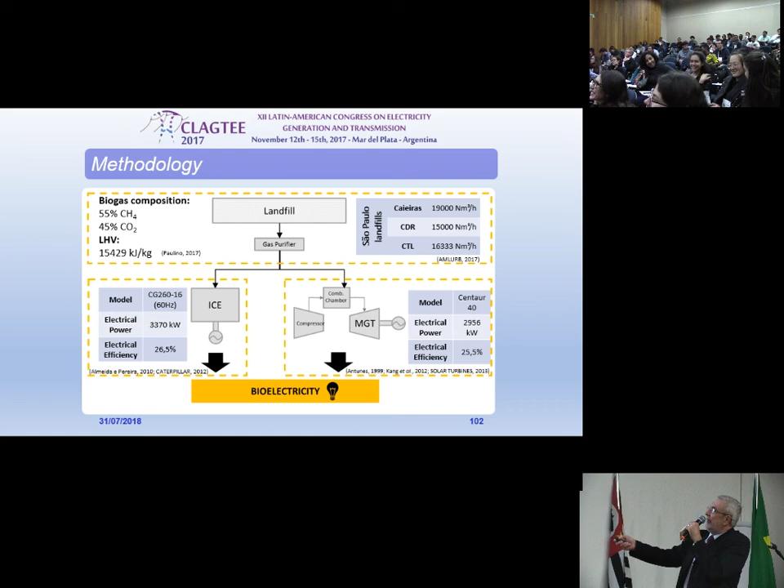Electrical efficiency of the micro gas turbines, electrical efficiency of the internal combustion engine considered in this study.

There are some equations about the economic analysis: investment parcel, operational composition of the electricity cost, maintenance cost, investment in internal combustion engine, investment in gas turbines, and the annuity factor. The annuity factor depends on the payback period of investment and the annual interest rates. It's very important.

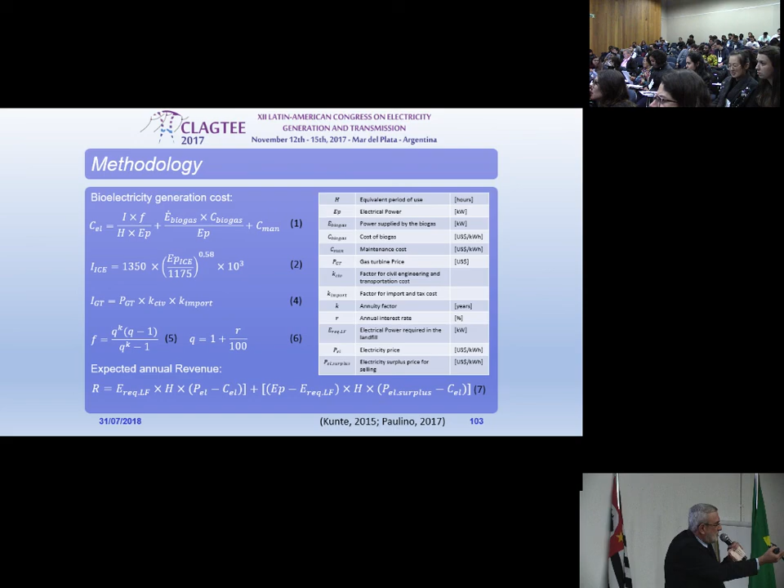The annual expected revenue of the landfill, when the landfill company gains by producing bioelectricity, is very important.

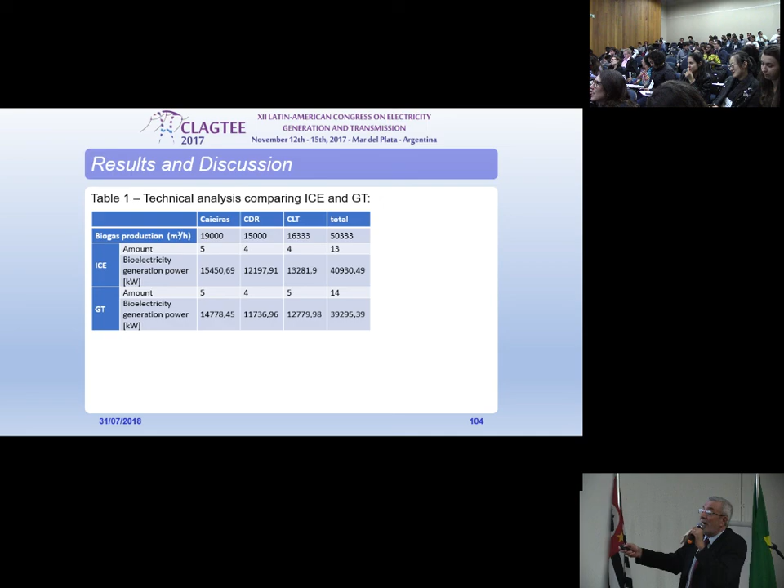In this case, for the internal combustion engine, the total electricity production, biogas production, and quantity of internal combustion engines and also quantity of gas turbines was studied, as well as the capacity of bioelectricity production using internal combustion engine, same as the capacity using gas turbine, because the thermodynamic efficiency is similar in this case, depending on the kind of micro gas turbine studied, okay?

And in this case, the total tons by day of the municipal residues, the quantity of biogas, and the quantity of bioelectricity production capacity - it's very important.

This production capacity is more or less the capacity of Guaratinguetá city. Guaratinguetá city needs this capacity - there are these requirements of electricity in the city.

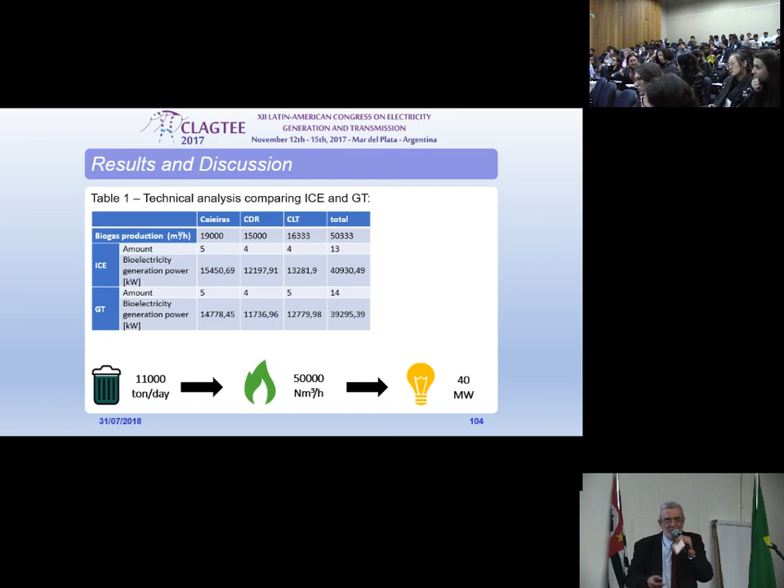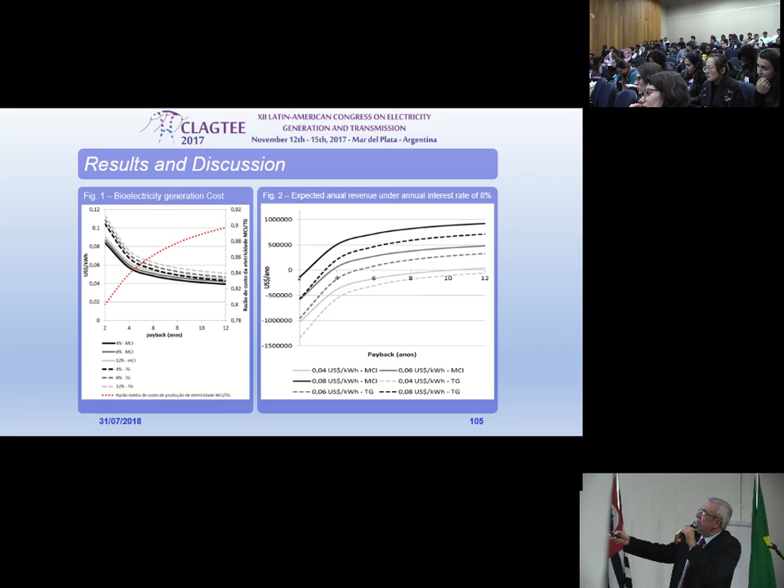São Paulo city is a big city, and there are some results of the economic analysis: the gain, the payments, the payback periods for internal combustion engine, and for micro gas turbine. Micro gas turbine is very expensive, the cost of electricity production.

And the conclusion - I wanted to introduce this thesis, this master degree thesis. This thesis is written in English, okay?

There is a paper now being published in the International Journal of Exergy Analysis. This thesis I recommend for you: Thermodynamic, Economic, and Emissions Analysis of a Microgas Turbine Cogeneration System operating on biofuels, syngas, biogas, and natural gas.

Benjamin Kant is a student from Germany. This thesis is written in English. I don't have time, professor, sorry if I used your time. Thanks a lot for your attention. If you have some question, please let me know, okay?

Okay, my name is Daniel, I'm from Brasilia. My question is regarding the internal combustion engine. You know, when you use biogas in an internal combustion engine, you need to make some arrangements in the water cleaning system, but I don't know what these arrangements are. Do you know? Is it not the same efficiency?

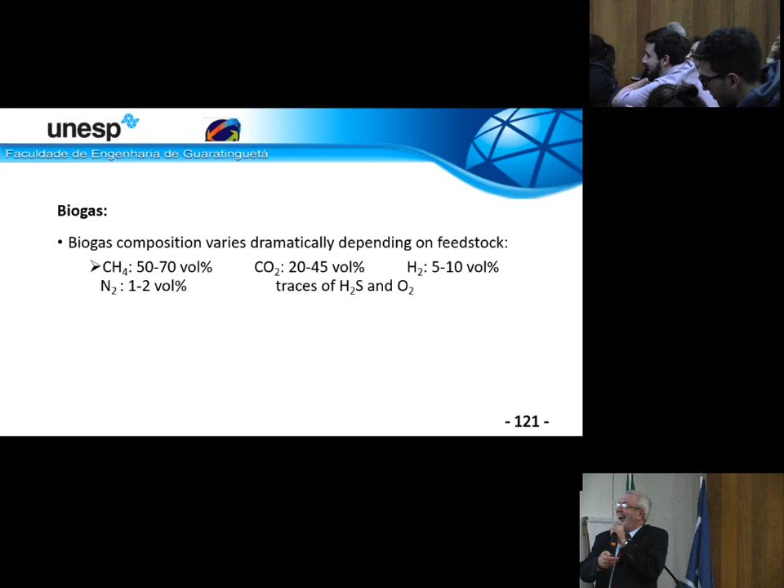Yes, you need to consider the investment in the clean systems, in the filters for biogas, because natural gas is a clean fuel - there is no sulfur in the natural gas, but sometimes in the case of the biogas, perhaps there is.

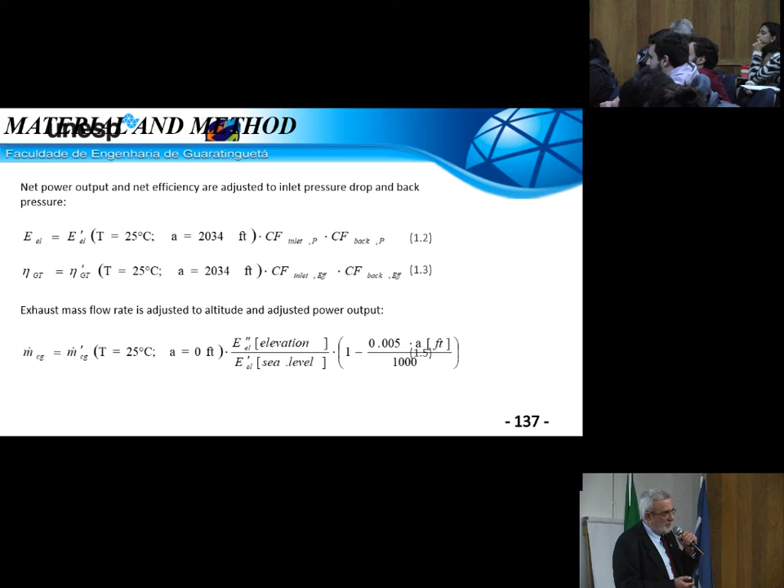So the composition of the biogas in the landfill doesn't consider sulfur, but in the case of the syngas, in the case of biogas, there's more methane, and then carbon dioxide. In the case of syngas, there is more hydrogen, and then carbon dioxide and methane also. So in stoichiometry, in the calculations, it is modified. In all these cases we don't consider sulfur, because in this composition there is no sulfur.

Okay, thank you. Okay?

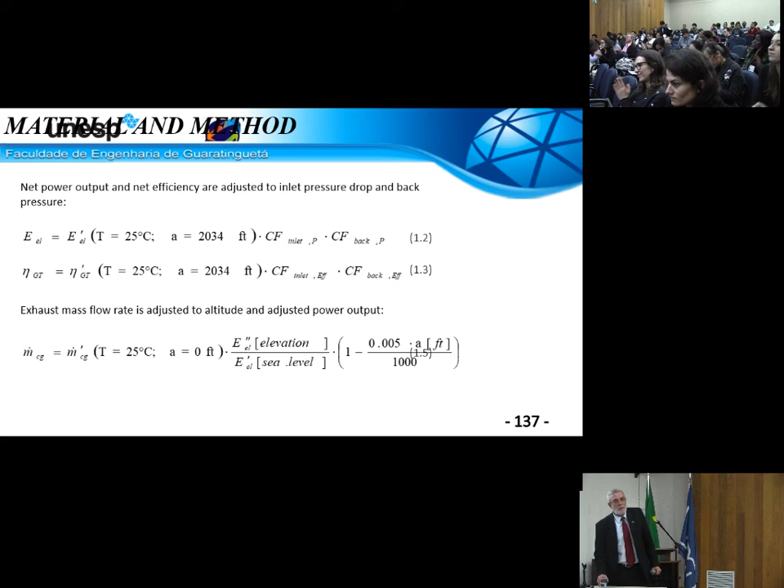Okay, so we are closing our bioenergy sections here.